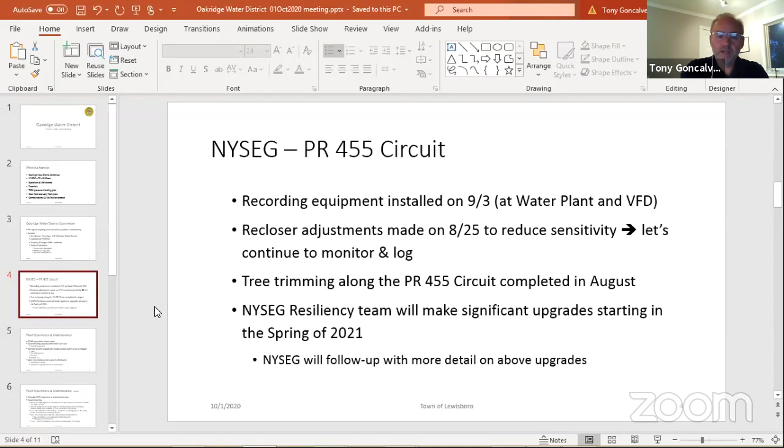Plant operations and maintenance - some brief notes here, and then maybe I'll have Tyler talk to anything specific. Tyler, are you still on? Yes, I'm still on. Okay, good.

So basically, at a high level, we're sourcing water from 5 wells, and those wells we know are high in iron and manganese, and that's being treated by the chemical systems that are in the water plant.

We are doing system flushing, two times per year. There is consideration to doing it once a quarter, and I'll get a little more into that on the next slide. We have chemical systems used, coupled with the newly installed SCADA control system, that will mitigate the THMs - trihalomethanes - iron, manganese, maintain pH value, bacteria, etc.

Water is tested daily at the entry point to the distribution to the district. Part of that includes verification of the clarity of the water and verification of proper removal of contaminants.

And I want to add here also that VRI, we do have new talent working there. Tyler happens to be one of the new folks assigned to work at the plant. We welcome Tyler to the water district, and he's been great in communicating to us and working closely with us to make sure that everything's working as it should.

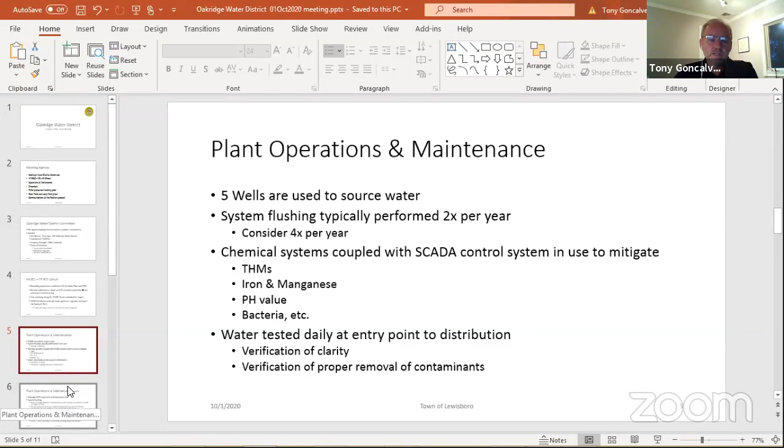The plant and operations maintenance, this is a continuing slide. So there is a plan in place, which I can display on the screen here real quick. This is what Tyler put together here. Let me just share this page. Hold on a second here. Okay.

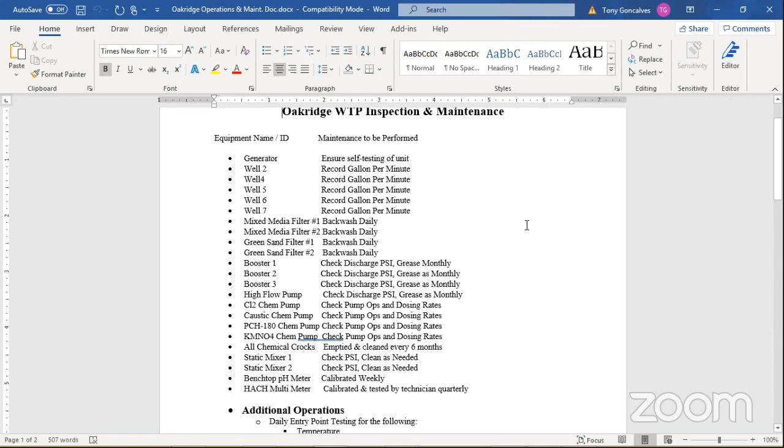So this is the Oakridge water treatment plant inspection and maintenance plan. I'm not going to go through all of this, and again this information will be posted on the website - I'll show everyone the location. But basically, this is the maintenance that's performed on a regular basis at the plant.

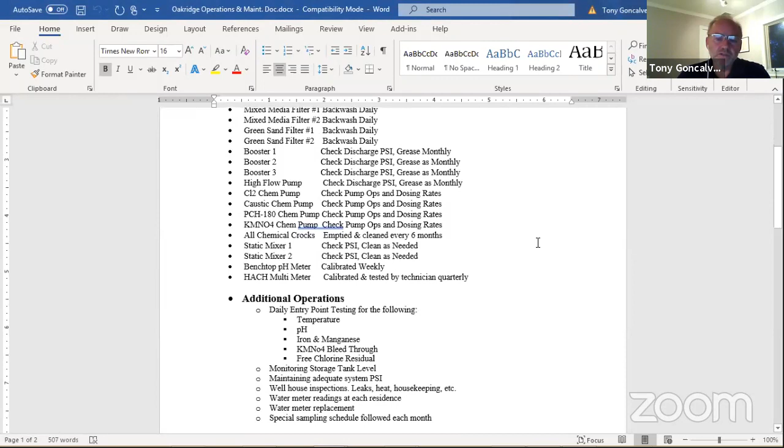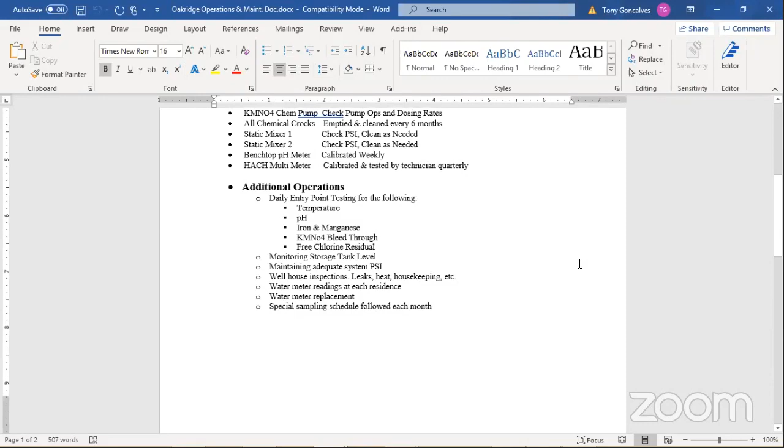And Tyler, if you want to jump in on any of these and further elaborate, feel free to do so. Sure. Like Tony was just saying, this is all maintenance items, mostly preventative maintenance that are performed on a daily, weekly to monthly, or even quarterly basis for all our equipment, from our wells to the sand filters, the booster pumps, chemical pumps, and other equipment in the plant.

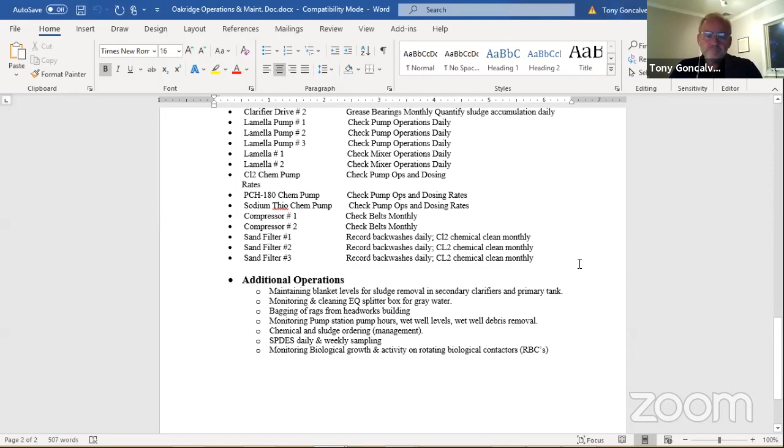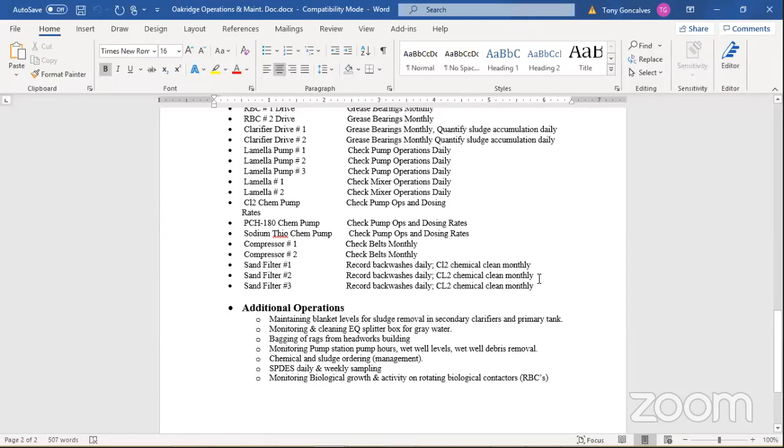So at the bottom there, that's what was referred to earlier as the entry point testing. It listed some items that are tested daily that are the key ones we're looking for to ensure proper treatment.

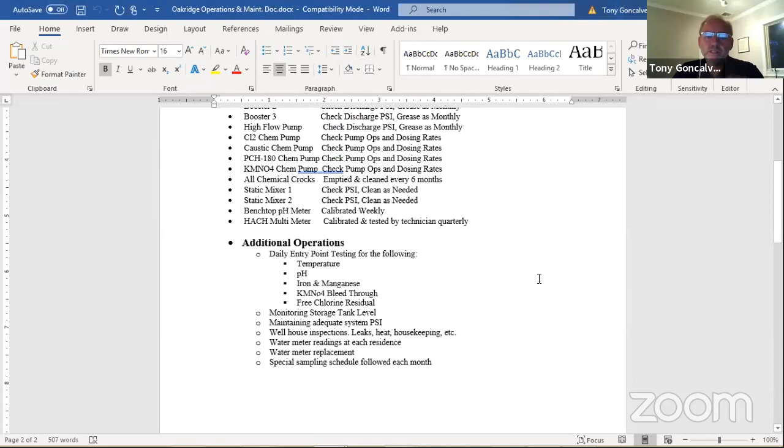So, the system flushing. Back on August 17th we had some reports of discoloration. It was determined to be attributed to sediment collected in the mains, primarily high amounts of iron and manganese.

The system was flushed on August 25th, and it was agreed to do it again on September 16th. We found that in prior flushings, the flushing rates weren't as they used to be, because not all pumps were used to provide optimal flushing velocity. With these last two flushings, we are now flushing at greater than 750 gallons per minute using both the booster pumps and the jockey pumps within the water plant to achieve the scouring velocity.

So what this does is flush out the sediment collected in the mains, and it also scours the interior of the mains. There are still issues with the dead ends of the water distribution system, which will require flushing hydrants.

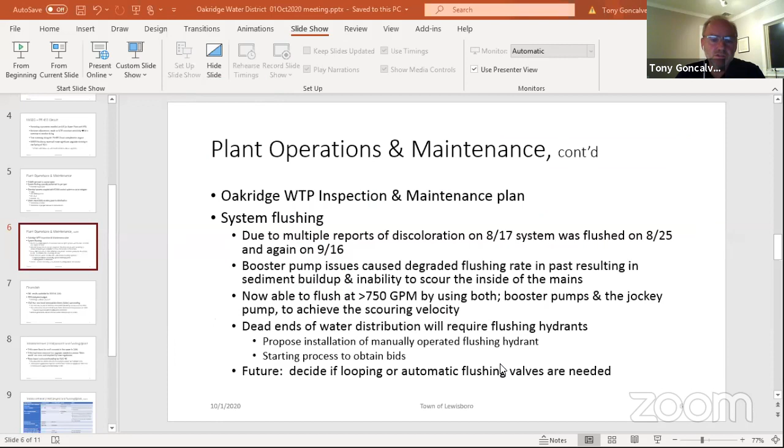I think I have a separate document that mentions those dead ends. I can put that up on the screen. Or let's wait, because I'm going to review that document separately. That's fine, I just wanted to make sure those two issues get somehow addressed at some point. Agreed.

Let me go back to the slide presentation here. So, is everyone seeing the PowerPoint? I want to make sure the screen share is still visible to everyone. Yes, okay. All right, financials.

We've put out there, and I shared this with Erica - she had requested it - the P&L results available for 2019 and 2020, and the 2020 adopted budget. Oakridge Water is on page 37 of that document. I'm not going to go into detail on this call, the documents are out on the website. I'll show everyone the location - if anyone wants to review them and has any related questions, let us know.

Leo Masterson, our controller, was not able to attend this evening, so if there are any specific questions about the budget or the P&L, we can take that up with Leo. Leo did share with me, regarding the bond anticipation notes, there are two outstanding. One issued in 2003 with $574,000 remaining, which matures in 2043. The second one issued in 2019 with $482,500 outstanding, matures in 2059.

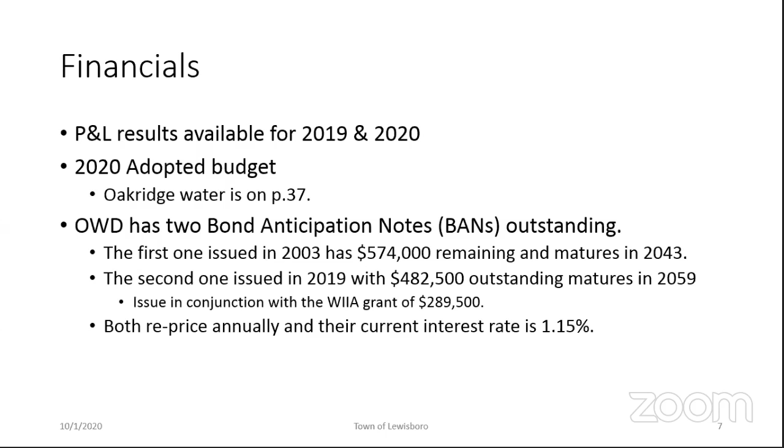The second one was issued in conjunction with the New York State WIIA grant, which is going to provide us with $289,500 for the THM project, which is still ongoing - I have another slide that will go into more detail about that. Both of these bonds are repriced annually, and the current interest rate is 1.15%.

Regarding the trihalomethane project and the grant, a little background: THMs were found in small amounts in the water in 2016 into 2017. THMs had been removed, but upgrades were needed to ensure they would not recur, and it was also required by state regulations. The town board authorized bonding of $482,500, and the bonding was a prerequisite for applying for the grant. The initial grant application was submitted in 2018, rejected in December 2018, and we reapplied in 2019 and received grant approval in December of 2019.

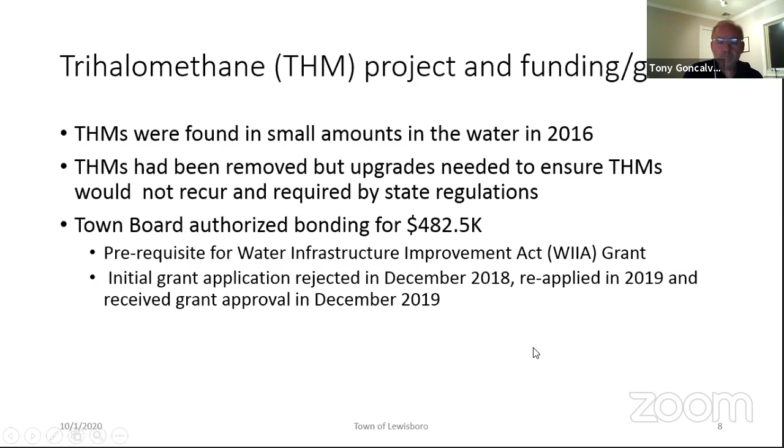This is a summary of the work associated with the THM project. On the left side are the improvements: water tank aeration, which is currently in process, with Delaware and VRI working with the Westchester County Health Department. And Bill, you sent me something - I didn't get a chance to read it, it was just the resubmission of the latest round of comments back and forth with the DOH.

The upgrade we did was both the water and sewer SCADA. It modernized both systems. The water did not have a SCADA system before. The sewer did, but there were a lot of problems with the old SCADA and the old supplier, and it was getting obsolete quickly. The new SCADA controls the equipment in both the wastewater plant and the water plant.

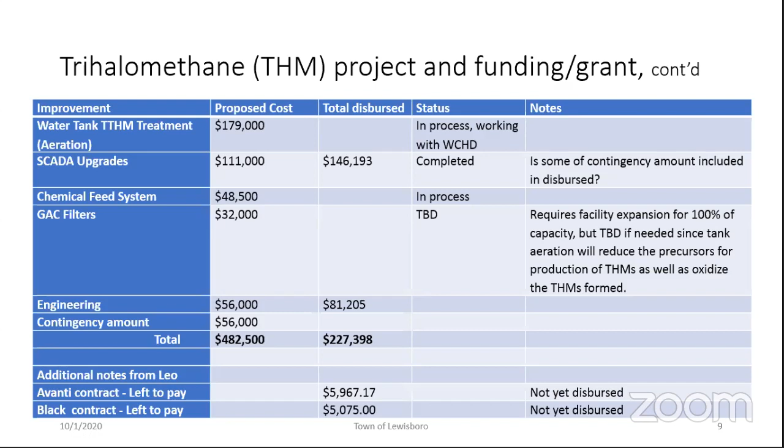These were some additional notes I received from Leo regarding Avanti and Black. Black is the electrical contractor, and Avanti is the SCADA and chemical feed company. Those two payments have not yet been disbursed.

Okay, so short-term and long-term plans. We talked about more frequent system flushes, quarterly. Tyler, when will we make a decision on that? And we do need to get health department approval, correct?

Approval, yes. They more or less want a flushing plan. They're not too particular on that stuff. If we were going to do less flushing, I think they would have an issue, but more flushing, they're not really going to have a problem with. So it's just a matter of getting them a flushing plan saying we want to move to quarterly for these reasons, and they'll be on board.

It's pretty much in the works now. We planned on flushing towards the end of this year one last time, and then moving quarterly from then on. Our last flush was September 16th, so we want to get that into effect right away.

We also spoke about the flushing hydrants on the dead ends, the manually operated ones. We'll reach out to Wayne and see what exactly he wants from us. I know when we did the flushing hydrant at Conan, it was a verbal approval. Just so everyone is aware, Wayne is with the Westchester County Health Department.

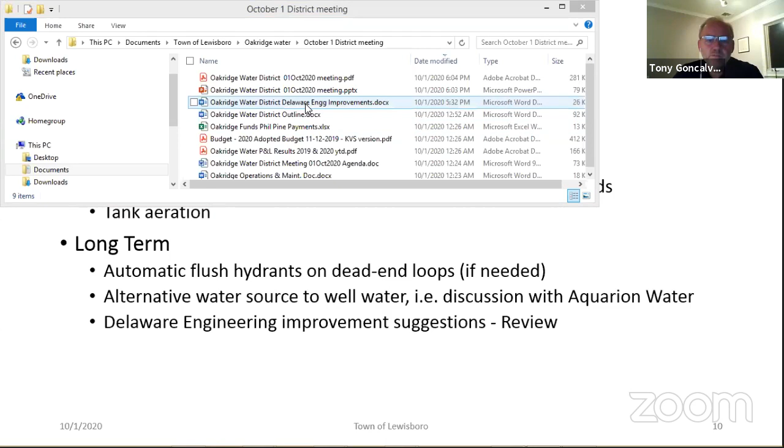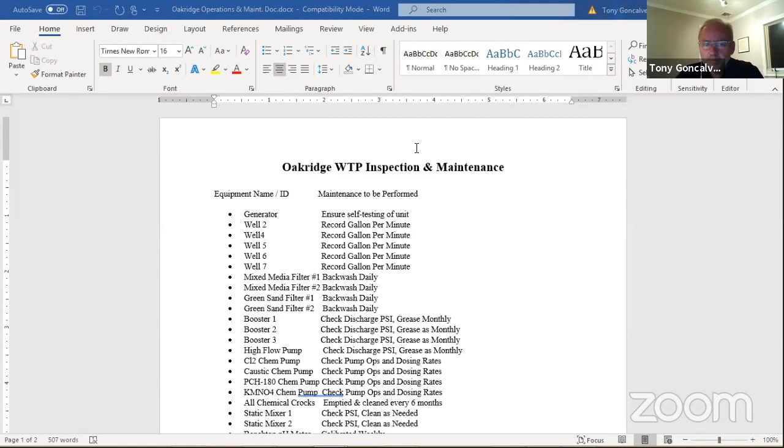Then we have the Delaware Engineering Improvements, which I'll bring up and we'll step through real quick. Let's see if I can find it here.

The aeration system, again, that's what's in progress. Chemical feed pumps - some already replaced, so this is in the works.

Number 3, the automatic flushing valves - again, recommended, but the first phase are manual valves. Phase 2 would be potentially automatic, but they may not be necessary.

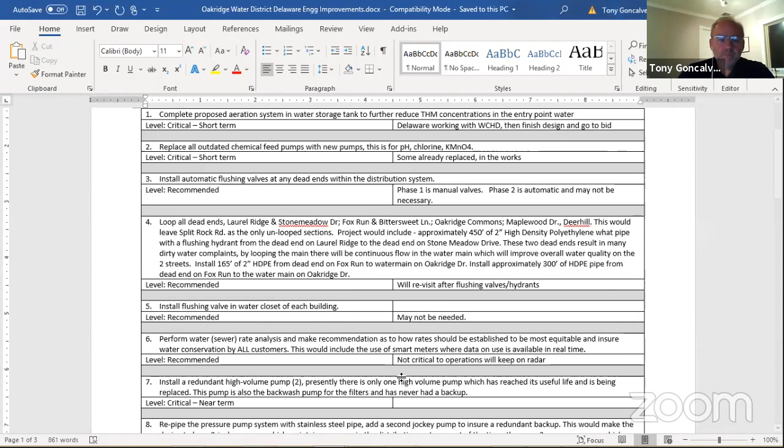Again, it's recommended. We will revisit whether this is needed after the flushing valves and hydrants are installed, and maybe this will be part of a larger project, to Bill's point earlier.

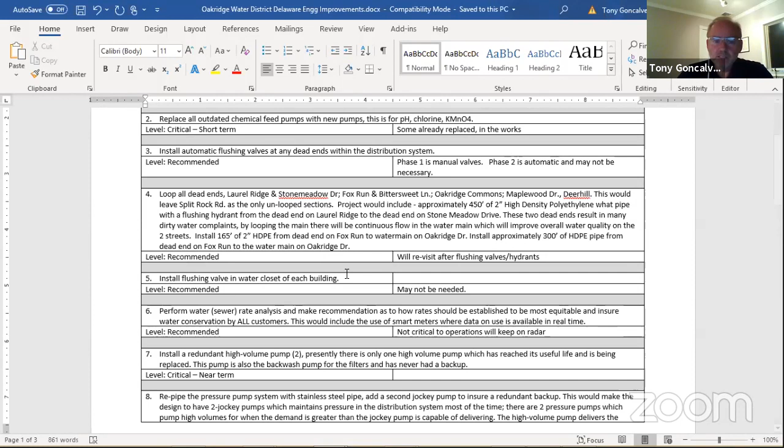Installation of a flushing valve in the water closet of each building is recommended, but it may not be needed. So I'll just skip through that.

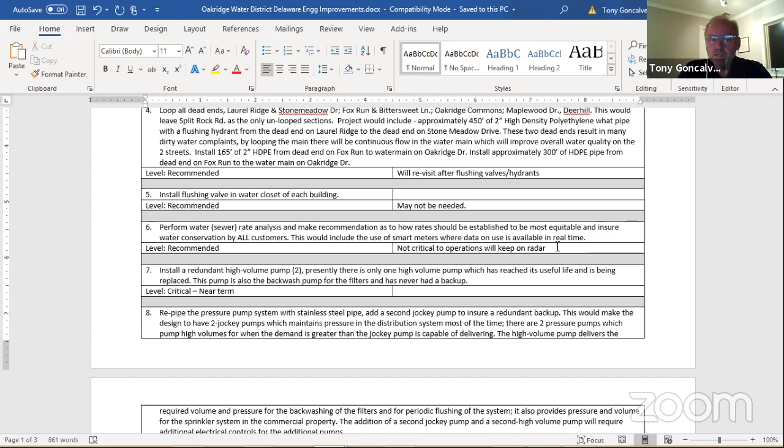Number 6, perform a water sewer rate analysis. This is another recommendation - it's not critical to operations, but we're going to keep this on our radar. It's basically a way to ensure water conservation, understand how much water is actually being used, and then determine rates from there.

Number 7 is a critical item. Near term, it's to install a redundant high volume pump. Presently there's only one, which has reached its useful life and is being replaced - in fact I think it has been replaced already. Is that correct, Tyler? Yes, that's correct, it was replaced in July. So yeah, this will be installation of a redundant high volume pump.

So, talking to Bill earlier, we're looking at packaging some of these items into a larger project, and then pursue some funding for that.

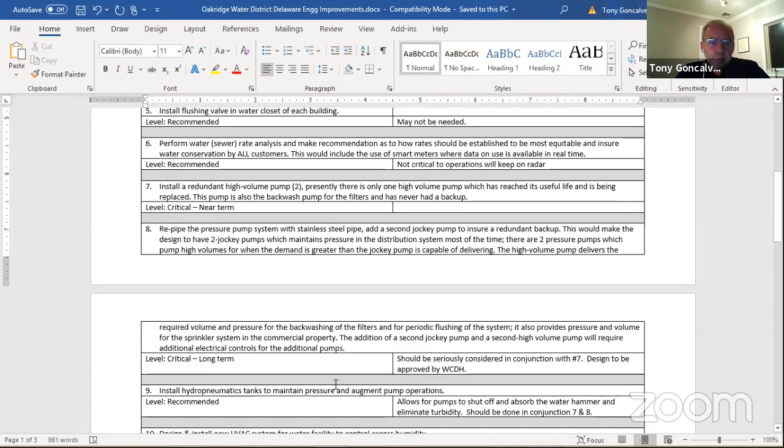Number 8 is repiping the pressure system with stainless steel pipe and adding a second jockey pump to ensure redundant backup. Again, this is critical long-term and should be seriously considered in conjunction with number 7, and the design needs to be approved by Westchester County Department of Health. So again, 7, 8, and also 9 would probably be packaged as one project.

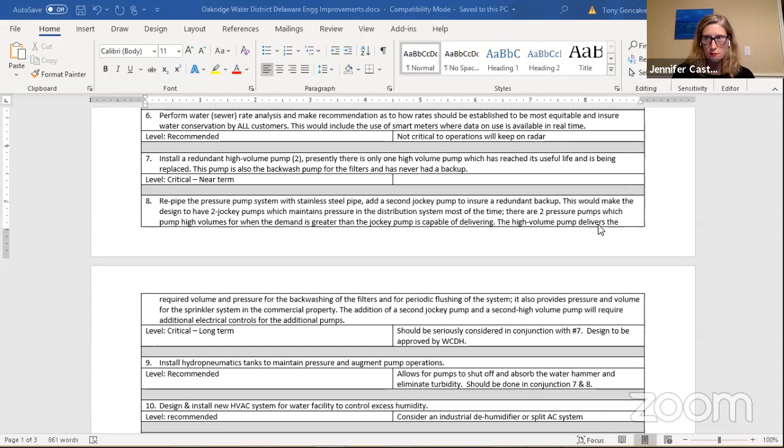Okay, maybe I could talk to you offline about that. The issue in Conant Valley, I don't know if it was so much with the metered rates, but with the way repayment of the bonds was calculated based on assessed value rather than usage. So I know this isn't a top priority, but I might be able to give a point of view on that to help.

Yeah, I was more thinking, if we're eventually going to have to replace meters, what we've found is that the real-time meter reading provides a real good benefit to the water customer and to the people operating the facility, because you can identify leaks pretty much very quickly. You can do a very good comparison of water sold versus water pumped, so you can identify leaks much quicker. It's been a good tool in the other systems that we've seen.

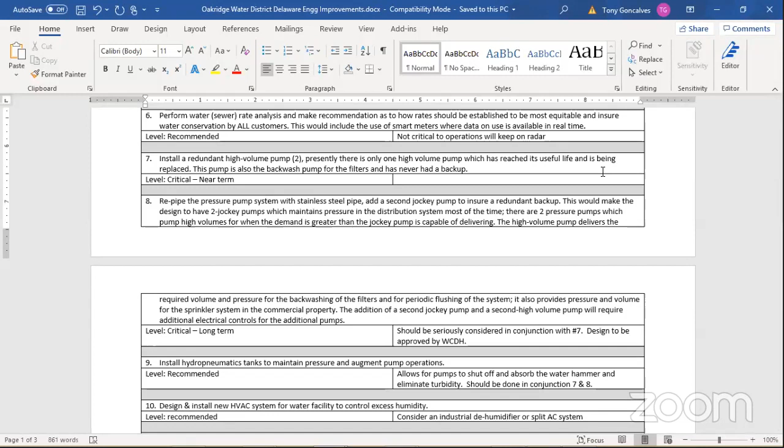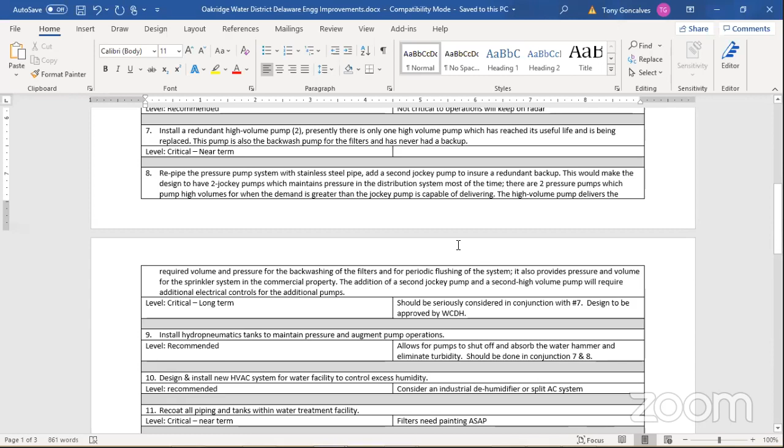Okay, so yeah, Jen, we can always have a separate conversation about that if you want. Let's see, we were here, let me just move this participant screen out of the way.

The installation of hydropneumatic tanks to maintain pressure and augment pump operations is a recommendation, and it allows for pumps to shut off and absorb the water hammer effect, thus eliminating turbidity. When pumps shut off, they tend to create water hammer, which is pressure differentials within the system. Potentially this could be done in conjunction with 7 and 8 above, and be part of that bigger project.

I think, Bill, it's recommended, not critical, but I know it's... Yeah, it would be a definite improvement. Right, and it would give us something we don't have now. Right now when the pumps during power outages all kick on, it creates a surge that goes through the system and disturbs whatever sediment may be in the system.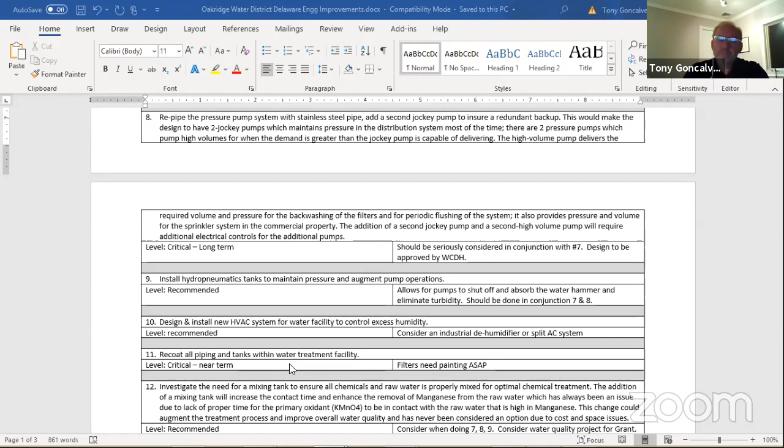With a hydropneumatic tank, you have an air buffer. Air compresses, water doesn't, so it takes the shock out of the instantaneous flow when the pumps come on. It would really reduce the changes of velocity through the system, and it would make the most difference in those short outages we're seeing, the blips, the on-offs. If NYSEG can't ever really solve that issue, we're going to have to come up with something to deal with it.

One way to deal with it.

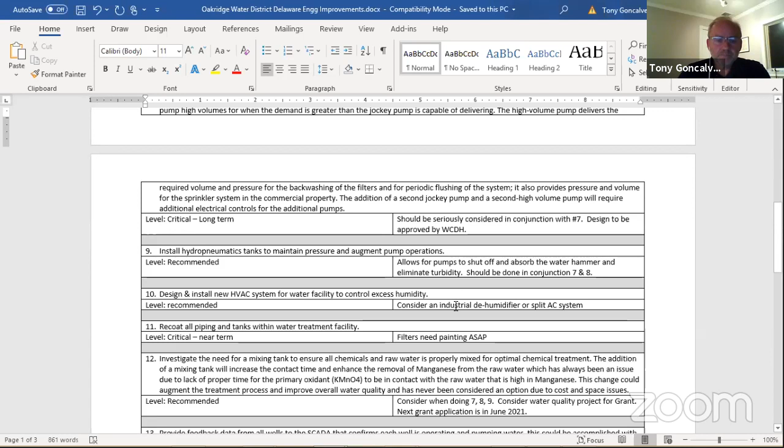Number 10, design and install new HVAC system. It's not necessarily an installation of a new heating, ventilation, air conditioning system, but a recommendation to install a dehumidifier. One idea is an industrial dehumidifier in the plant, or a split AC system, which is less expensive than a central AC system. That's to control the excess humidity in the plant today, and that's a recommendation as well.

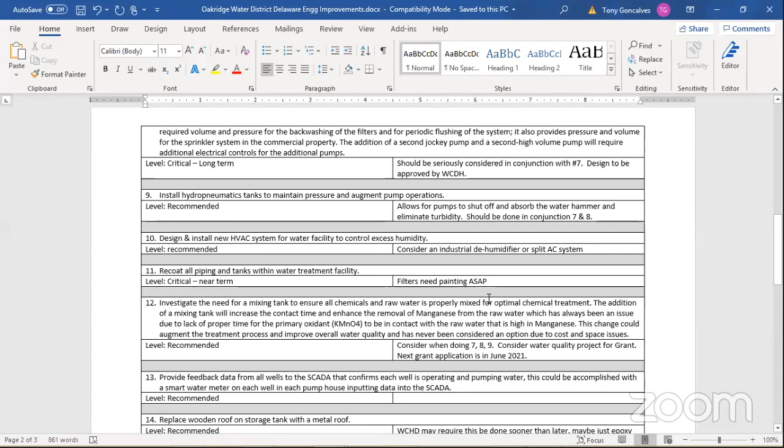Recoat all piping and tanks within water treatment facilities is a critical item. It's a matter of painting the filter equipment in the plant.

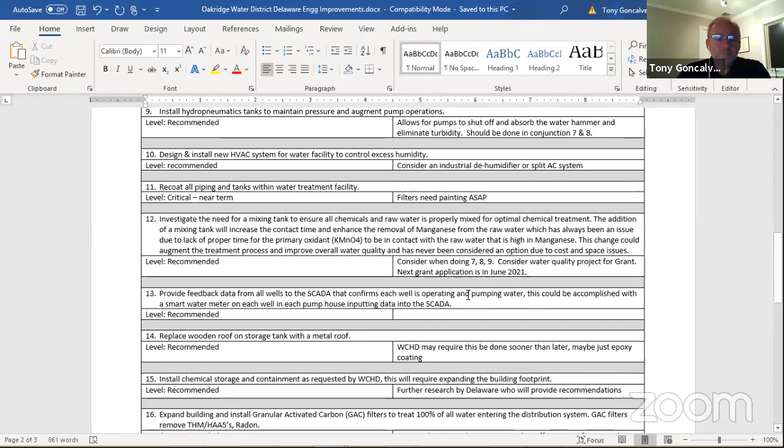When is that going to get done? We haven't scheduled it, but this is something we need to work on doing. I don't know if Tyler or Bill want to chime in.

Well, we have to address the humidity issue, or wait another month or two. Actually, October is a good month for painting, probably the lowest humidity we're going to get, but we're going to need to dehumidify in there to paint. That's the point, okay, and to get it dry.

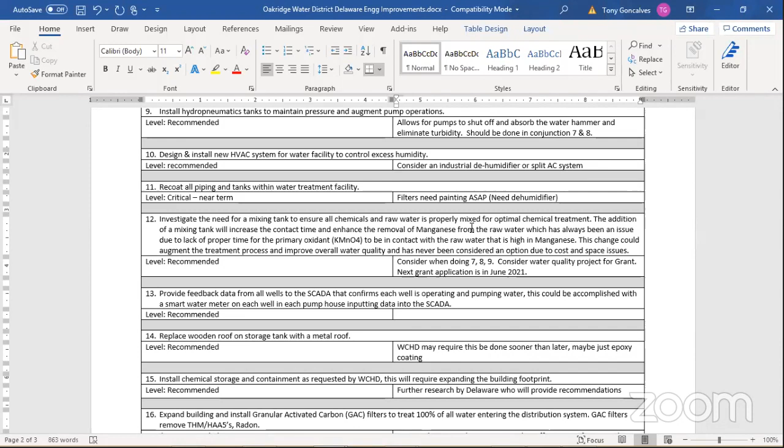So are you gonna get it done? That's up to the board to approve. We would have to get a price, Tyler would have to get some pricing, just to paint the filters. Probably we could get a price from VRI to do that. I would imagine, I don't think that would be much.

But you're gonna have to purchase an industrial dehumidifier, that's for sure. When I see an item marked critical, near term, ASAP, we have to do that. Right, correct. And that's why we reviewed this list a couple days ago, and as a result of that review, we now need to act on these critical items.

The other one, number 12, is a recommendation for investigating the need for a mixing tank to ensure all chemicals in raw water are properly mixed for optimal chemical treatment.

Yeah, I've already started that. I believe the most cost-effective thing to do is to rehabilitate and repurpose the fiberglass pressure vessels that are in the plant, and convert them into mixing tanks.

But I have to first solve the GAC issue with DOH, and once we resolve that issue, then we'll be able to submit a plan to repurpose them. It's a fairly simple piping change.

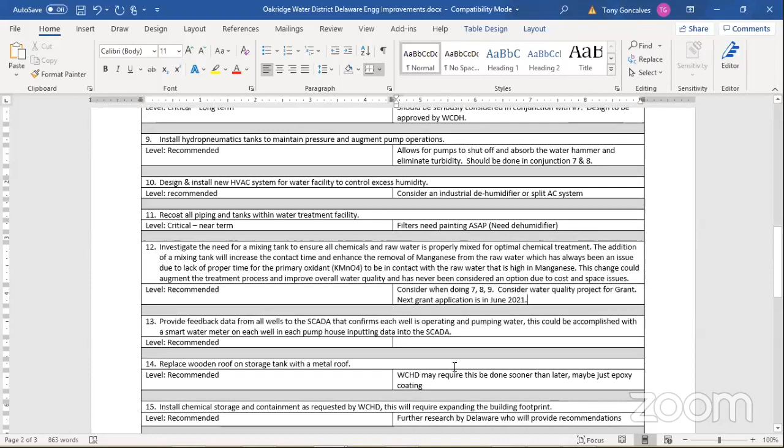Okay, number 13, provide feedback data.

We could certainly do that repurposing and run it as a pilot to prove it. I'm sure it's going to work, but that way we can qualify it for a grant. We would do temporary piping to it, and then permanently pipe it in as part of a water quality project.

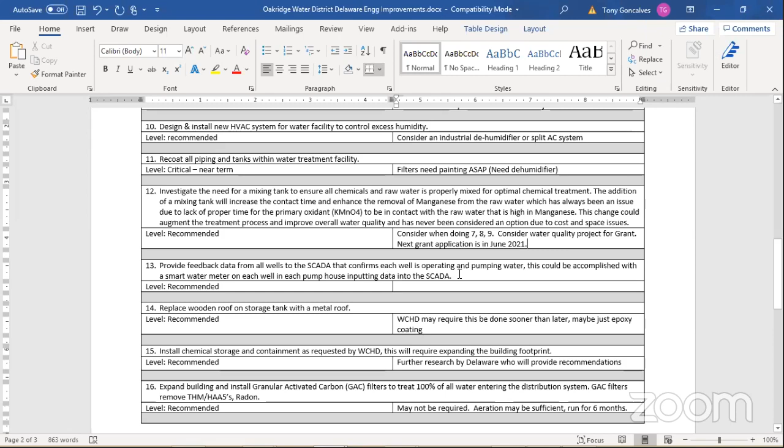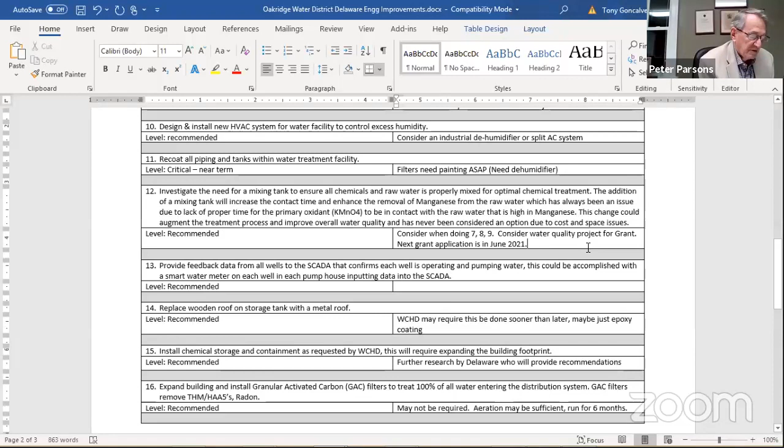Okay. Bill, that's good, because we need to find a way of paying for as much of this as we can. And I guess the one column missing on these two pages of 17 improvements is an estimate, and I really mean an estimate of your belief in what each one is going to cost.

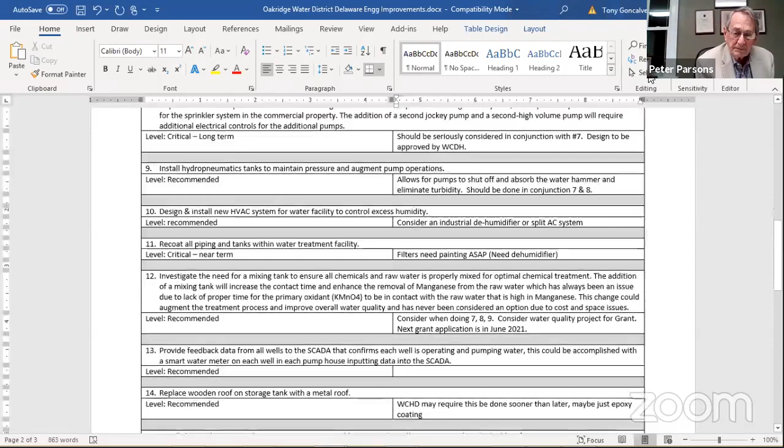And then we need to reduce that to a short list of what we feel we should do now, and then we can put that out to bid, presumably, and also apply for money from wherever.

Yeah, the WIA grants for water are 60% — usually they'll pay for 60% of the project as long as we can show it's for water quality improvements. WIA doesn't provide drinking water monies for main replacement or capital improvements like that, unless they can be shown to improve water quality. Well, as far as I can see, everything on your list has the objective of improving water quality. That's correct.

Bill, quick question, this is Erica. I just want to make sure I understood you correctly. Are you saying you want to repurpose the GAC filters for something else? So use the fiberglass housing for something else?

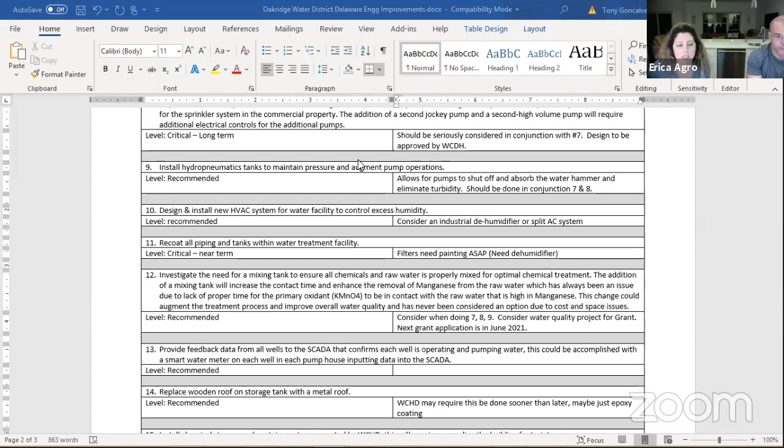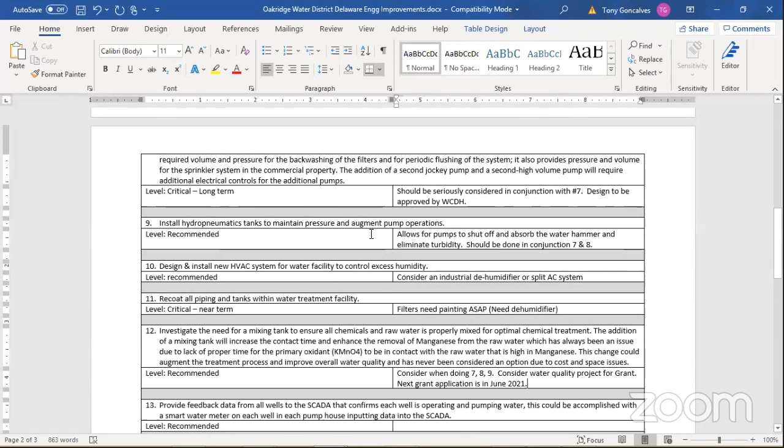That's correct. Okay, I'm a little confused because I'm looking back at your recommendations from April 2017, and you were proposing at that time to convert those filters into GAC filters. So now you're saying you don't want to use them as GAC filters? That's correct. What made you change your mind?

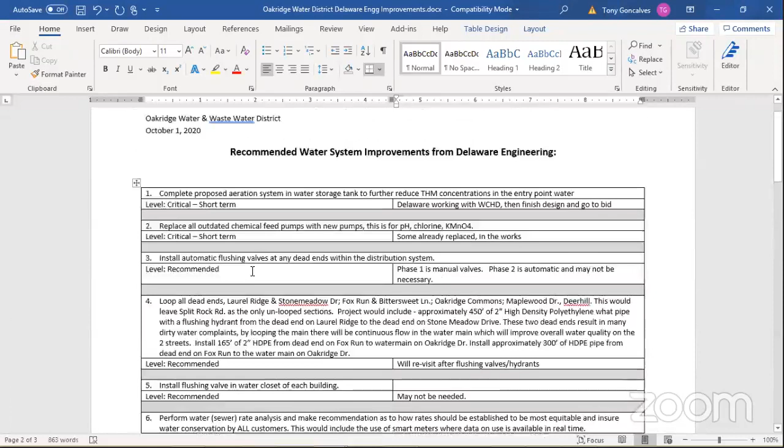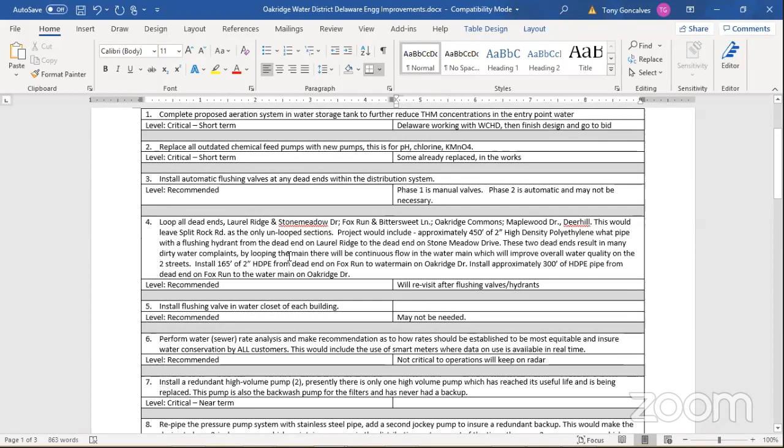What's changed is that we're well below the MCL for THM, and we haven't even installed the aeration system yet. And what we were going to do with the GAC filters was only use them for removing total organic carbon, TOC. It was kind of a stopgap. Back when we made that recommendation, we were still violating, and we had no clue where the precursors were coming from. We still don't know where they came from, but they're not here anymore. The bromides that were actually causing the problem have left us, they're not part of the raw water anymore.

So we were in a completely different mindset at that point. We were throwing everything at the wall to try to reduce the entry point water. The entry point's always been in compliance, to lower the organics enough so that we weren't producing THMs in the distribution system.

Since we're already there, we're not even aerating yet. We believe the aeration is going to dramatically reduce the precursors as well. And if after we do that we still have a new THM issue arise down the road, the next recommendation would be to put granular activated carbon on the entry point after filtration, not before. That's the correct place to filter with granular activated carbon.

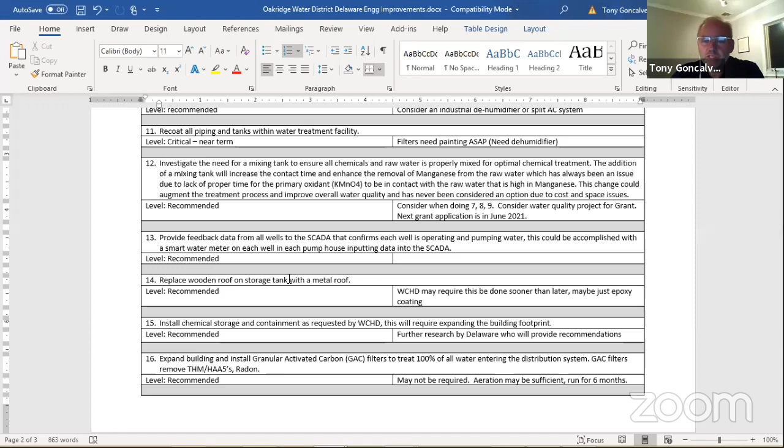Number 14, replace wooden roof on storage tank with a metal roof. It was a recommendation. The health department may require this be done sooner than later, but right now it's not something urgent to the operations of the plant.

One idea Bill had was maybe we just epoxy coat the existing concrete roof. What everyone needs to understand is that the storage tank has a concrete roof on it. What they didn't like was that there were puddles on the roof, and that's why the wooden roof was installed. I think there's probably a better way to do that, maybe with some leveling concrete and putting a pitch on that roof, then epoxy coating it and not even having a wooden or metal structure on it.

Okay, so we can, excuse me, we can actually, if that's something we could do, within maybe the maintenance department. It doesn't take much, right, to put in leveling concrete. But we'll look at that. As long as the Westchester County Health Department stays quiet about this, it's not an urgent issue to be concerned about.

Number 15, install chemical storage and containment as requested by the health department. It's a recommendation, again, not critical to operations.

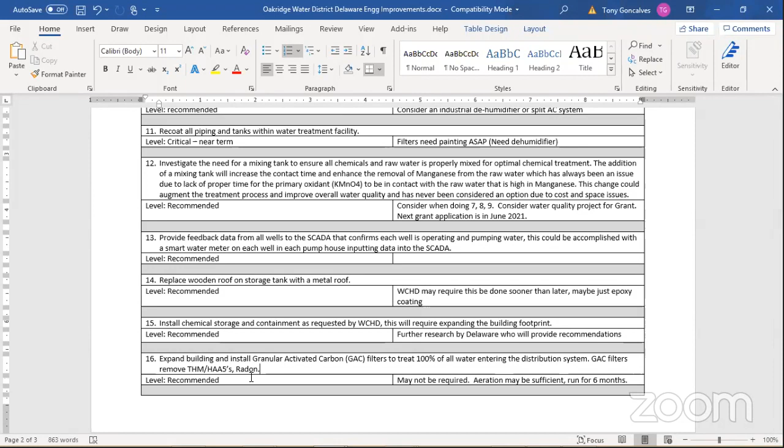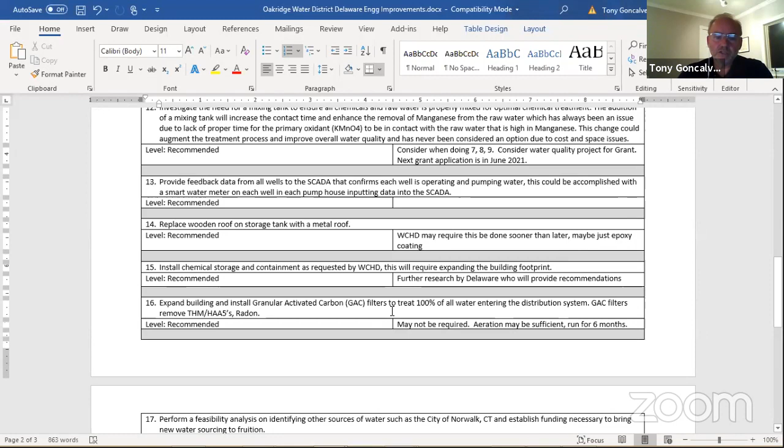Number 16 is what we just spoke about, the GAC, granular activated carbon filters. Again, may not be required. The aeration may be sufficient. We'll run it for 6 months and then make a determination. To Bill's point, if GAC filters are required, we have to expand the building and put in larger containment vessels to treat 100% of the water.

Well, the other thing is that granular activated carbon is the go-to media for water treatment. It's pretty magical, actually. It removes volatile organics, it removes radon, it removes PFASs, it removes so many contaminants. So oftentimes owners of public water supplies elect to put GAC filters on their final treatment, after all the other treatment, as a means to guarantee 100% removal of anything that might occur or come into the aquifer in the future.

So that's just, I mean, we're installing a lot of GAC filters in a lot of different places these days. And that's why I put it in there, because I could see the people using the water at some point deciding that that's what they want to do.

I have Simone, had a question. Simone? Yes, first I'd like to say thank you, Tony, for even taking this on, and to Erica, who I've had several conversations with, she's so on target. I'm thrilled that Jen Castellano found this important enough to attend, because I think clean water in 2020 that's safe to drink is really something that should be a given in Westchester County, where the taxes are so high.

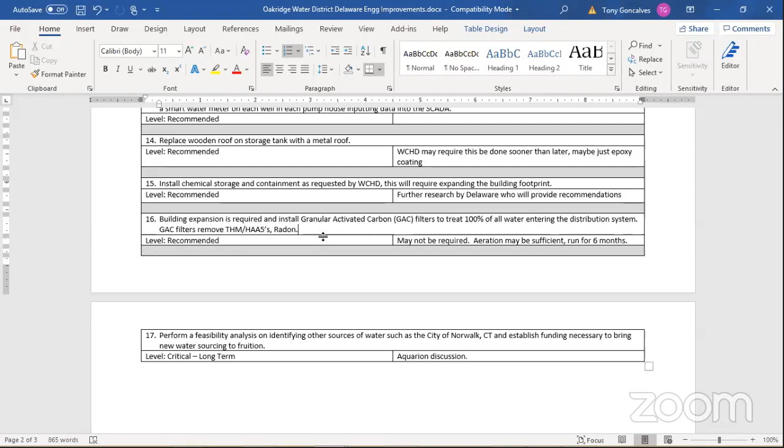I've tried the water, it's disgusting. I'd love for the health department to come and drink it. I've spoken to people who drink it, and they said it's fine.

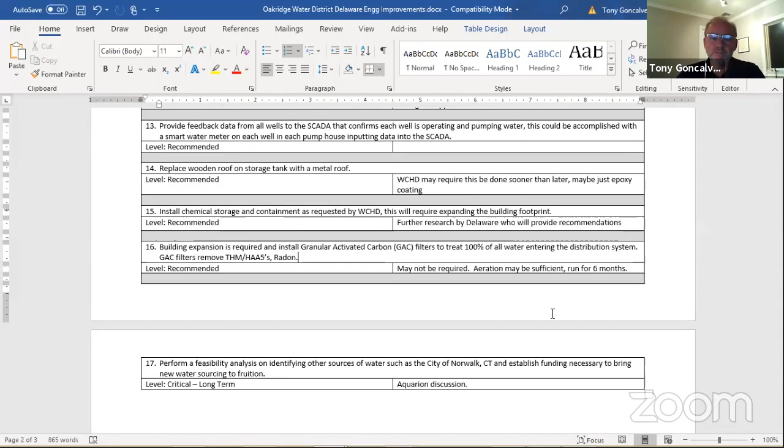I know the discoloration is an issue, and that's due to turbidity of sediment in the system, but that's getting resolved. Hopefully the discoloration will no longer be an issue, especially after we do the flush hydrant installations.

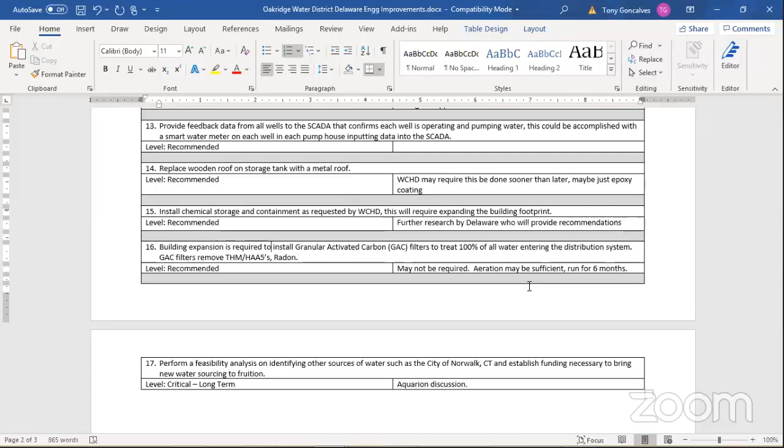I just want to make a quick comment about the roof we were talking about. As part of the aeration system upgrade, if everything gets approved and we move forward, there's going to have to be ventilation equipment and so on installed. So at that point, and prior to that, there should be serious consideration as to what we finalize as far as the roof, whether it's replacing with metal or another structure. That's something that should be looked at within the very near future.

Thank you, Fernando. I have Robin Leganzowski, you have a question? Hi, I just wanted to ask if time is of the essence now just to get this done.

Why wouldn't you flush every month to start and back down from that? Why wouldn't you want to reach the result sooner, then maybe go to every other month and back down to quarterly to get this done? We did an August 26th flush and a September 16th flush, both at high pressure or high flow rate, which we believe cleaned out a lot of what was in the mains.

I'll let Tyler answer in more detail. The reasoning is we're very confident that quarterly flushing will be sufficient. We flushed with the high volume pump, both booster pumps, and the jockey pump, all the pumping capacity we have at the treatment plant. It took 2 days because we didn't have enough storage to do it in 1 day. We flushed over 80,000 gallons, so we feel going from twice a year to quarterly will be sufficient.

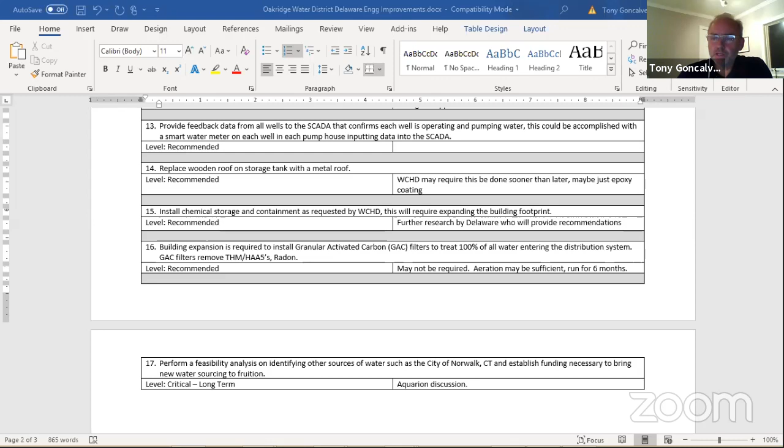So number one, a lot of folks are in agreement that until we have an engineering study by an independent engineering firm, we won't feel confident that any of these solutions are anything more than just a Band-Aid. And while some people may agree that we do need Band-Aids in the interim, folks have overwhelmingly expressed, whether they think the water is fine or not, that they want an engineering study with alternative analysis, and an independent one. Tony, you and I have spoken about this, and it is an overwhelming demand of the folks in the water district. They want to know what's going on with the wells, with the plant, with the systems, so we have hard data and we can make good short-term, midterm, and long-term decisions.

Right now, it feels like we're very reactive. And part of that is probably a function of we have limited funds, although to Jeff's point, we really don't know how much funds we have. So we never have any idea where this money is coming from. But we absolutely need this engineering study and a formal alternative analysis.

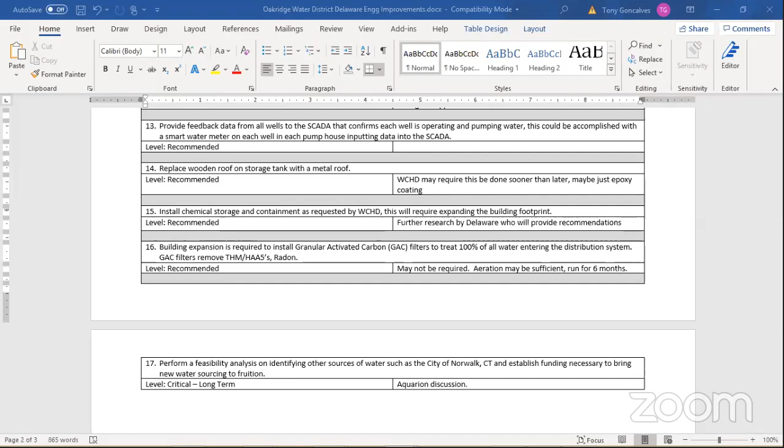So that's number one. It's a request, and we know we'll need funding for that. And we know that the town has to be behind working on getting a grant or finding us money for that. And a study could take up to 18 months. So in the meantime, these short-term things we have to do, fine. But we need to have a robust, independent, comprehensive engineering study done.

That's number one. To all the folks who are on the call, if you're having these power outages, the interruptions, I urge you to report them to the New York Public Service Commission every single time they happen, and get a case number and keep reporting with that case number every time it happens.

I wanted to ask, I think it was Fernando was talking about the wells. I know we have 5 wells. My understanding from the last time I toured the plant and speaking to the folks at VRI is that only 3 wells are really in use. One is just too high in iron and they can't use it, and another one is just not used. So we really only use 3 of the 5 wells at one time. So I'd love to hear if somebody can confirm or refute that.

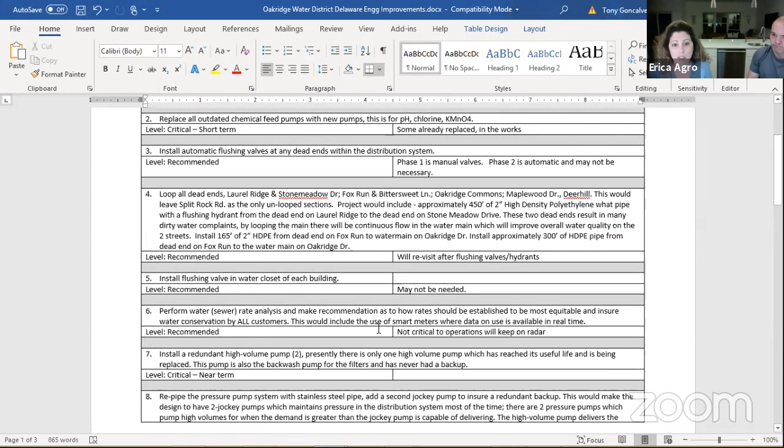Looping is a best practice when you're developing. The first part of the development, the Oakridge part, wasn't looped. Our understanding is the Boulder Ridge section where we live in Laurel Ridge isn't looped either, that it ends at the end of Boulder Ridge. That might be incorrect, but if it doesn't loop, that's a problem of the planning board. The planning board should not be allowing developers to not loop these water and sanitary pipes.

It's something I know that the town board appoints the planning board, and I think that's something they may need education on because it's really causing us a lot of problems. I hate to think they're perpetuating those poor practices of allowing developers not to loop. So that's something I think the planning board needs to address, or you need to address with them.

Looping is reviewed by the health department, not the planning board. So why are they allowing this to happen? When I spoke to the health department, I spoke to Wayne Schneider frequently, and he said that that's a standard best practice. So why is it not being required?

Well, probably, this was built in the 1980s, so I don't know if it was the best practice then, but I agree it should be looped. As far as looping goes, that's really the design of the water system is 100% the health department's responsibility. Laurel Ridge wasn't built in the 1980s.

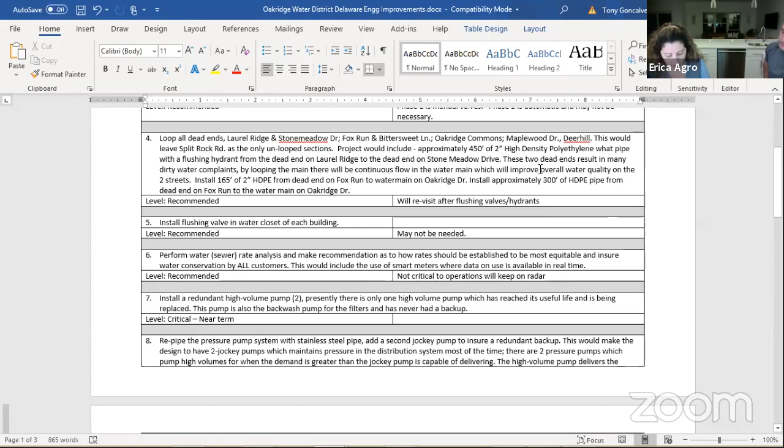Right, exactly, the other phases weren't built then. The new phase that's still being built right now, I don't know if that one's looped or not. I'm just saying Laurel Ridge was not built in the 1980s. I just moved in here two and a half years ago. It's brand new, so that's not accurate, at least for this phase of development.

As far as flushing goes, what is the flushing costing us? Is that like a Band-Aid, or are we supposed to be flushing monthly, quarterly? Does the system always require that? I think Bill said that most systems do. I just wanted to understand more about the frequency and what does that cost us. Is it a drop in the bucket, or every time we flush, are we spending a lot of money on the flushing?

The next question was about the water tank aeration. Speaking with Wayne Schneider at the Department of Health, he told me that you guys were going back and forth, meeting Delaware Engineering quite a bit, and that he wasn't necessarily sure water tank aeration was a common or best practice, and that he needed demonstrative proof it would do anything to improve our system. We've been going back and forth with them on it for a really long time, and they're not satisfied that we've proved it's going to help our system. So I kind of wanted to understand more about that.

So that was one question, and then I think the last question is if we... Well, let me explain on the grant approval. The grant approval from New York State was that the New York State Health Department reviewed the tank aeration, and the grant was approved based on tank aeration. So the fact that Westchester County doesn't think it's a best practice, then they need to get together with New York State Health Department because they already approved it. We're just waiting for a sign off from Westchester County.

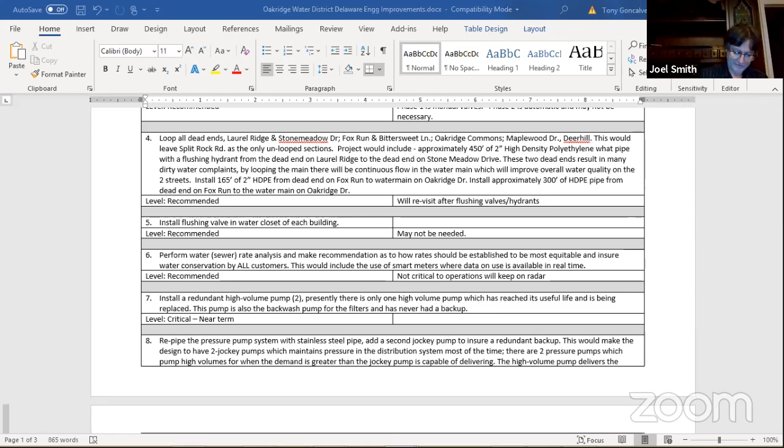But I do know that we have also had issues with our appliances. And we always get told, oh, it's just the hard water. Will all of these improvements help us with keeping our appliances more than 2 or 3 years? I know dishwashers are affected. I know that we just recently had a major issue with our washer that was brand new. Is that stuff going to be, are our appliances going to be lasting longer with these improvements?

I can't speak to that, Bill. I don't know. I know that typically hard water does cause... We just automated the pH adjustments, right? So by automating the pH adjustments, we won't have a wide swing of pHs, and the higher pHs certainly increase the hardness of the water. I mean, the water is not hard - the water is highly corrosive when it comes out of the ground. So what we actually have to do is we have to condition it with a chemical to bring the water up to a pH of 7.2. So we actually add hardness to the water.

In the past, there was no automation on that management. It was a manual thing. They would take a pH reading, and if it was low, they would increase the hardness, and if it was high, they'd lower it. Now that's done automatically, as of this year, after the SCADA system, correct. So I could see where we were overdosing hardness in the past. That's a possibility - that's inherent in a manual system like that. So I would think that the automation on the pH adjustment will certainly provide a more consistent pH and hardness level in the water.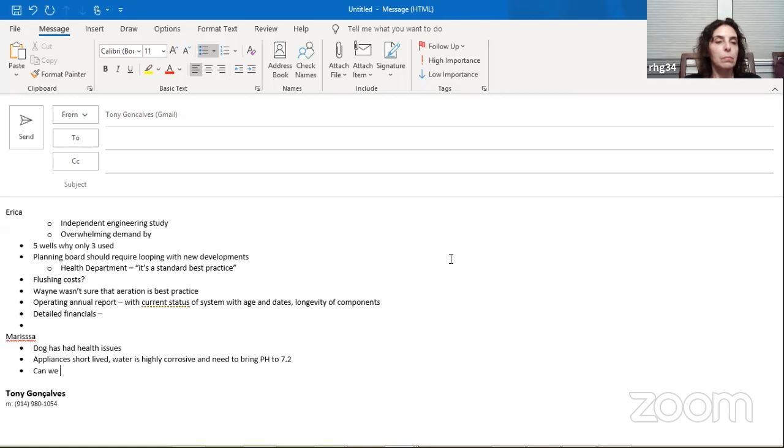I didn't know they approved the car wash. I thought that was the stupidest thing I ever thought of, using our water line. So next I have Harenstein.

One quick thing - Corey, are you unmuted? Yes. Can somebody explain to me what the legal structure is of the water district, and who the officers and directors are?

Well, the town board are the commissioners of the water district. And what does that mean, commissioners? What is their responsibility? We have oversight over the plant.

But as far as legal ownership, who owns the water district? The town. Yeah, the water district is an independent governmental entity - it stands alone. It's not funded by anything but those that live in that district. So then the town has no responsibility for any maintenance, improvements, anything whatsoever? Not even that - the town legally cannot contribute to the water district or the sewer district.

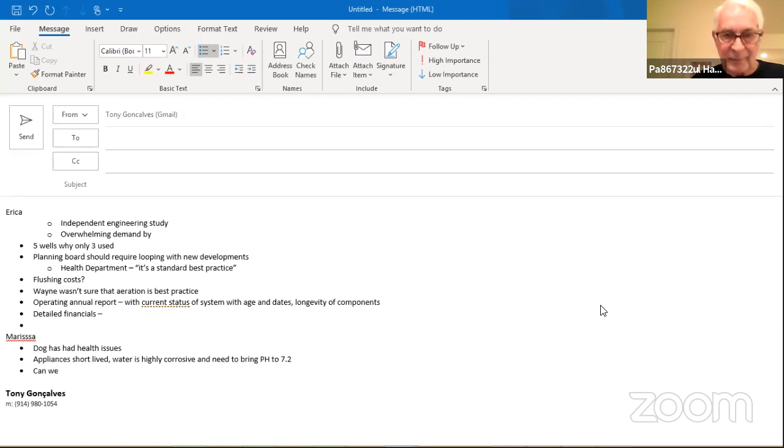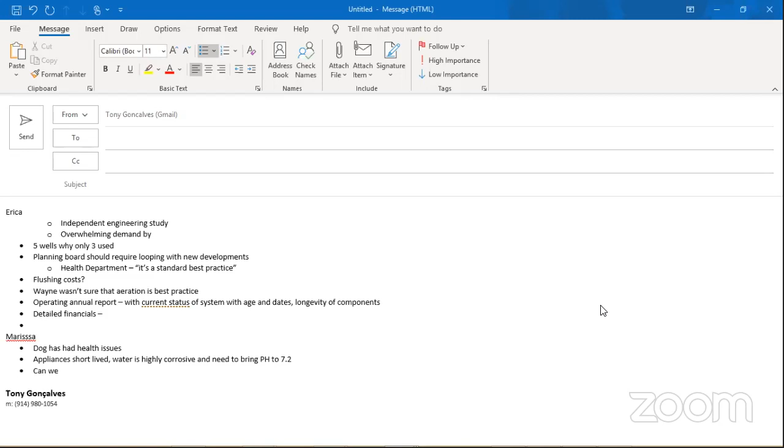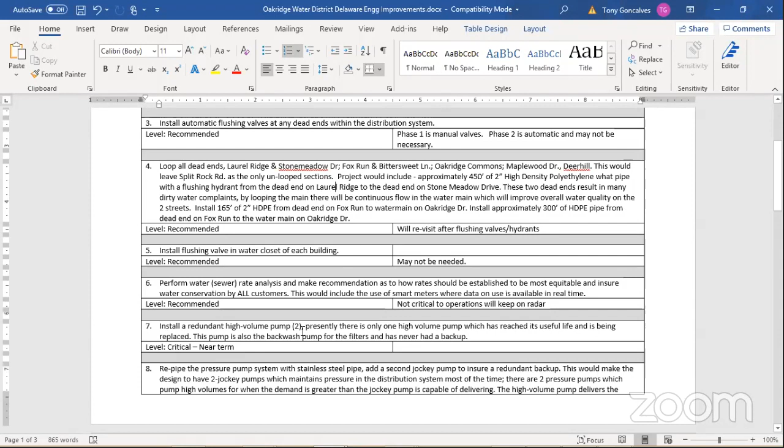I'm curious about these dead-end loops. Could you tell me how many there are and where they are? It's on that document, number 4, if you're looking at the screen. The screen isn't very clear on YouTube. I'm not on Zoom. Oh, you're on YouTube. Tony, that's basically all of Oakridge. So we're all of Oakridge? You mean each street is a dead end? Is that what we're saying? I guess there's a dead end. Well, Tyler or Bill, correct me if I'm wrong, but there's a dead end on every street? Is that correct?

Looking at number 4, those are the streets in Oakridge: loop/dead ends, Laurel Ridge and Stone Meadow Drive, Fox Run and Bittersweet Lane. So those are the intersections? Okay, yes, Maplewood Drive, okay. So each street is a dead end.

Well, in light of that, it would really seem that, given what you've said about the sedimentation problems, this hydrant flushing should be more regular. I think I'm repeating what someone else has already said, so I don't want to waste time here, but is this an expensive project? What kind of numbers are we talking about? We don't have numbers yet, but reading further in this description, it talks about 2 dead ends which result in many of the dirty water complaints: the dead end on Laurel Ridge and the dead end on Stone Meadow Drive.

Okay, so is there anything that could be done for those users now? Yeah, that's the flushing hydrants we're planning on installing. So even if we don't do all of the streets, could we at least do those on a more regular basis? Yeah, we need to look into this further and determine where they need to be done, but that's correct, we could probably start with those 2.

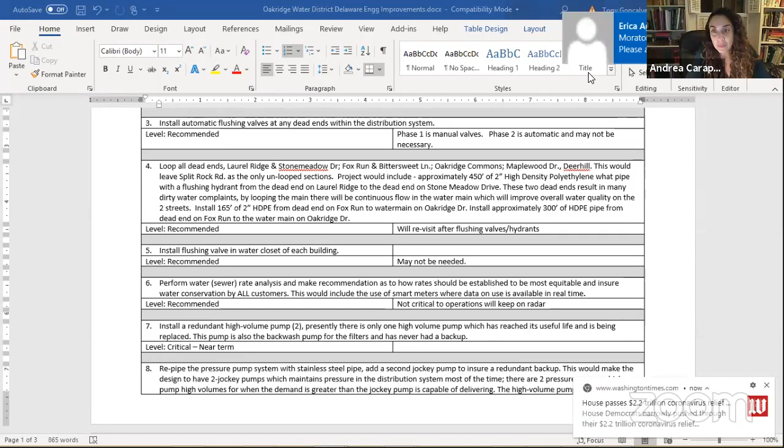Well, I find this topic very interesting, but that being put aside, it's my understanding that the system that was put in place originally was intended to expand with the development of Oakridge and the surrounding areas. And for one reason or another, that never happened. So all of you were sitting there with a system that's greatly overextended. And through the years, it appears as though they're just throwing solutions like spaghetti at the wall and seeing what sticks, and nothing really sticks.

But something that Tony said grabbed my interest, that being the meeting or the starting of conversations with Aquarion Water out of Norwalk, Tony. And I'm just throwing this out there as an idea that I came across, but wouldn't it be interesting if you were able to work out an agreement with Aquarion where they are able to pipe water into Oakridge, Laurel Ridge, and wouldn't it be fabulous if that could also be extended to include places like Copia and the other side of the street as well?

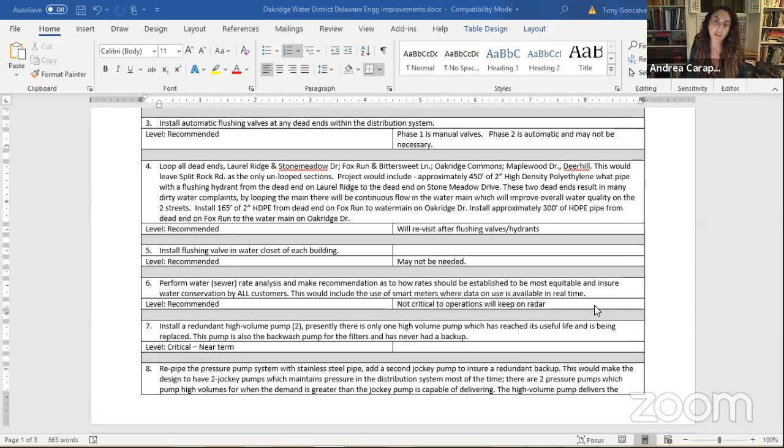Yep, those are all facts, Andrea. That's correct. All right, thank you, Tony. You're welcome. Peter, you're on.

Peter Parsons. You're unmuted now. Get out of here. Somebody running against you, Peter Parsons.

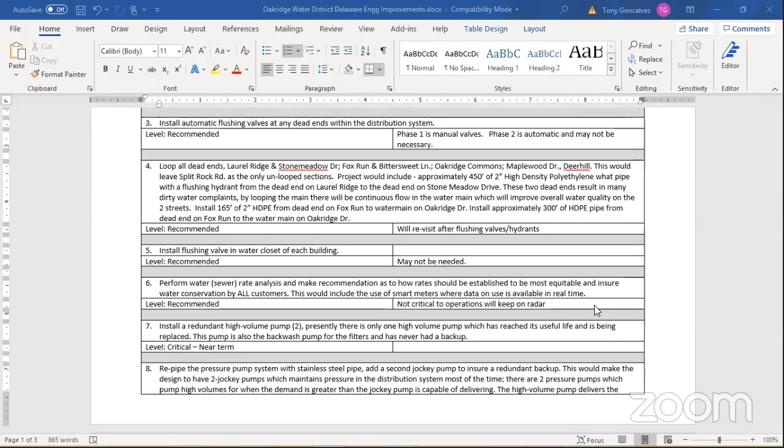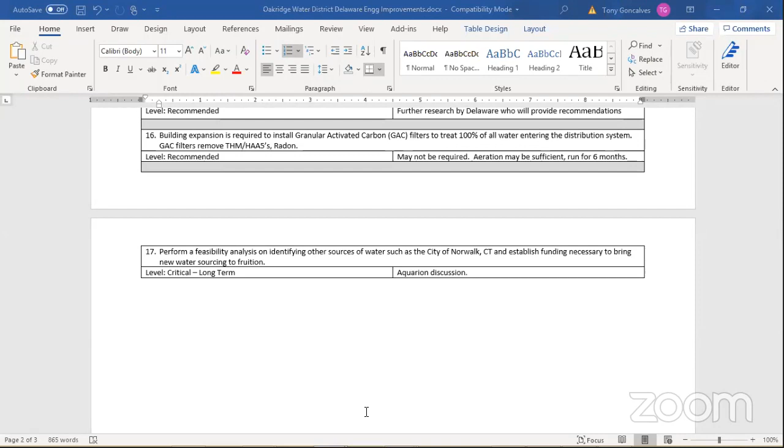We went through that list, we went through the 17 items. Maybe there's term limits, so I'm going to move on back to the presentation here. Hold on a second. Let's see if I can, okay. So I think this is the last page. Yes, this is the last page.

So regarding communications on notifications, which Erica touched on before, currently the way it works is there are email lists, there's posted flyers, Mike Lombardo, who works for the management company...

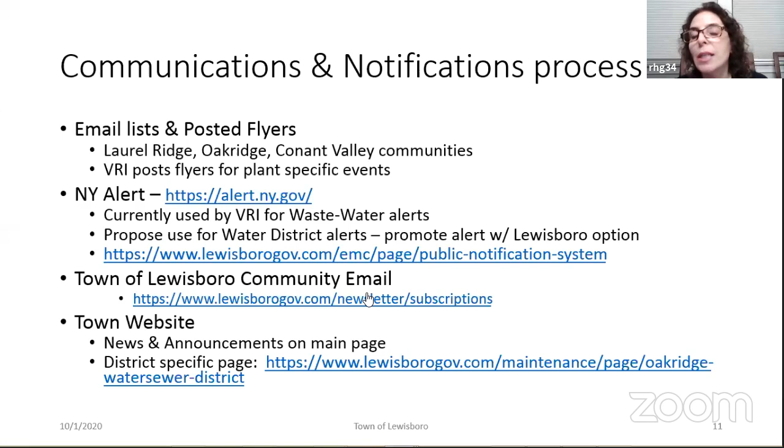Tony, I hate to be pushy, but go ahead, Robert. We need some kind of time frame. Yeah, we'll work on that. I mean, that's all we seem to be hearing, is we'll work on it, and it just gets regurgitated into the next meeting.

So in the presentation, I talked about short-term versus long-term. Short-term, the important thing are the flushing hydrants. So we're going to put those in. What's short-term mean? We're working on it now. We need to size it, get bids, and then hopefully, when I was talking earlier, we talked about like a November timeframe possibly. I know that's next month already, but we're gonna need final approval for the flushing hydrants from the Westchester County Department of Health, and then the flushing will be immediate, like I said earlier.

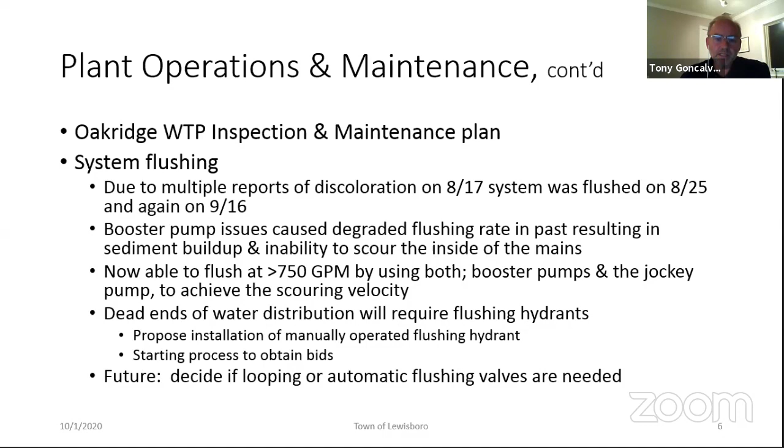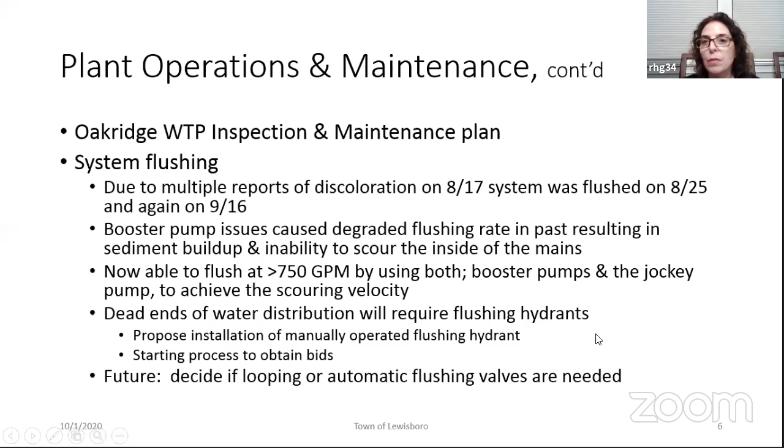So that's the other variable, right, the health department. So hopefully, but I understand, Robin, dates are important, scheduling is important, and I will strive to do my best to put all that together. I mean, you're doing a great job. It's just, in general, everybody's frustrated, and we keep hearing the same thing over and over. No, I understand. It's been a long time, so yeah.

Okay, so unless there's any other, hold on a second, I'm getting messages. Hi, Tony. Oh, Peter, yes. I'm sorry, but there was a town emergency and I had to go in and work with our police chief. I'm just seeing that, yeah, I got a message from the chief, that's why I left the meeting.

Oh shoot, okay. If anybody's left, the planning board cannot change the law, they can only implement the law. So if the filling station car wash was legal, then they have no real option but to approve it. That's it.